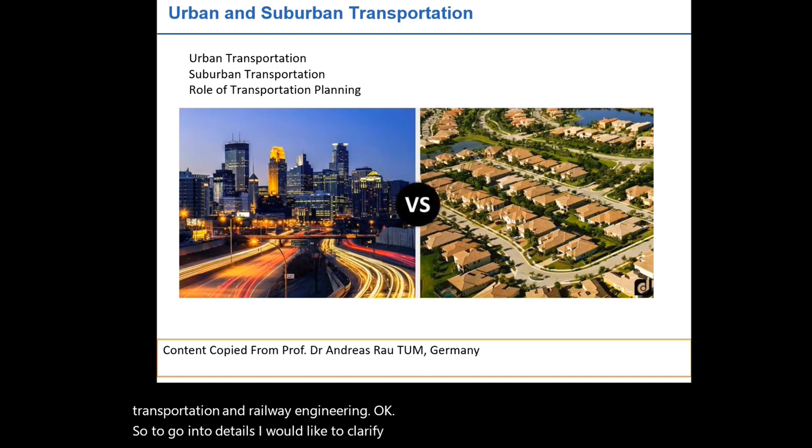So to go in details, I would like to clarify that this course content is copied from one of my teachers who's working at Technical University of Munich in Germany, Professor Dr. Andreas Rau. So I follow him as my benchmark. And of course, in this transportation system, most of the curriculum is designed according to MIT, Harvard, Technical University of Munich. Okay, so just to elevate and reach our level to the world standard organization.

So first of all, to go in very detail, I would like to explain what is the difference between urban transportation and suburban transportation. So the urban transportation system consists of passenger and freight, through which we differentiate in the modal choice, which is transportation services are actually classified into land, water, and air-based systems. So in urban transportation, the movement of people within urban areas or within a geographic area while using different transit modes such as buses, trains is called urban transportation.

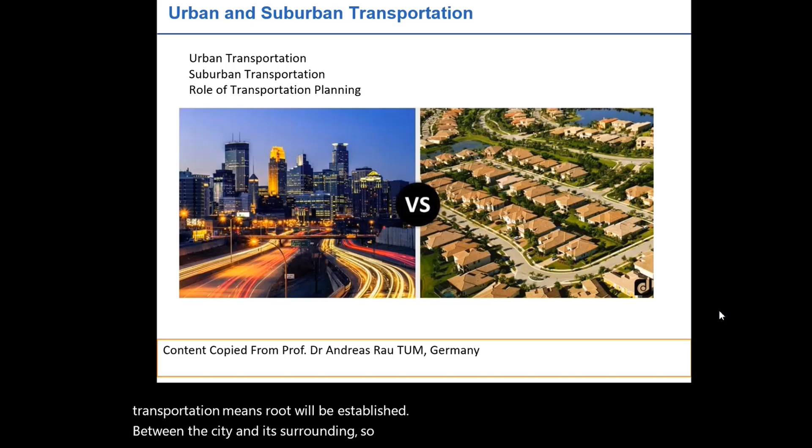So the second term is about suburban transportation. So keep in mind one thing, urban transportation will only operate within the city and within the geographic area of the same city, while suburban will actually connect the neighborhood along with the other rural areas. So suburban transportation means that the route will be established between the city and its surroundings. Okay, so basically all those people who are working within the city but live in the outskirts or outside of that city, this is called suburban transportation.

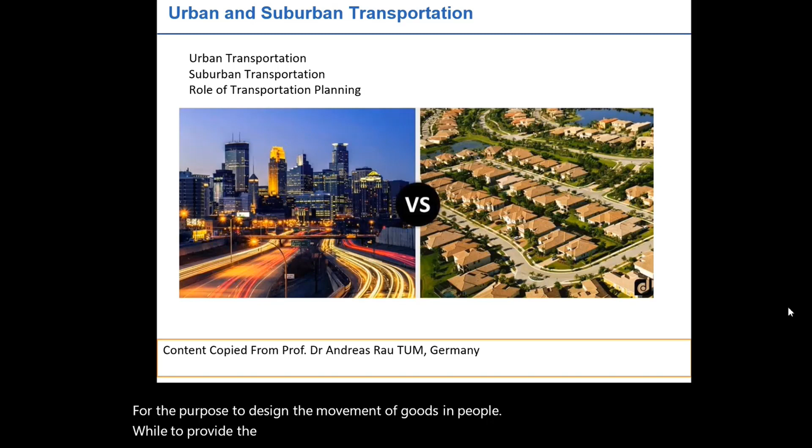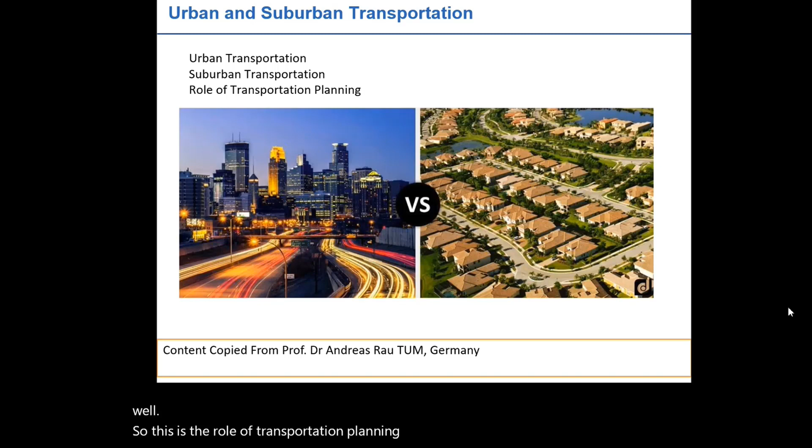So to understand the role of transportation planning, transportation planning basically entails creating the policies, goals, vision in future for the purpose to design the movement of goods and people, while providing the services for the current time as well as planning and designing for the future. So this is the role of transportation planning, to connect and design urban and suburban transportation.

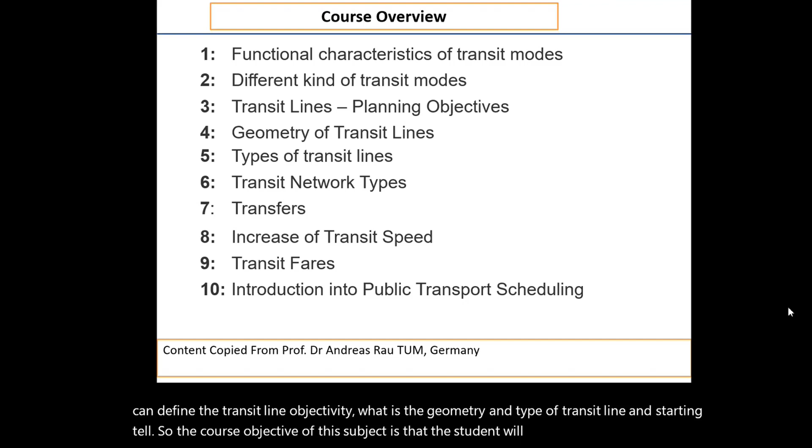In this specific subject or course, we will try to start from the functional characteristics of transit modes. We will also try to understand what are the different kinds of transit modes existing, how we can define the transit line objectivity, what is the geometry and type of transit line, and so on. So the course objective of this subject is that the student will understand the functional classification of transit modes, and at the end of this course, they will be able to model and design public transportation scheduling.

I would suggest that these slides will be more than enough. But again, if you want to go in more detail, I would suggest to go for Urban Transit Planning, the book which is published by Vuchic. So you can have a look. I would consider it as a benchmark for this subject.

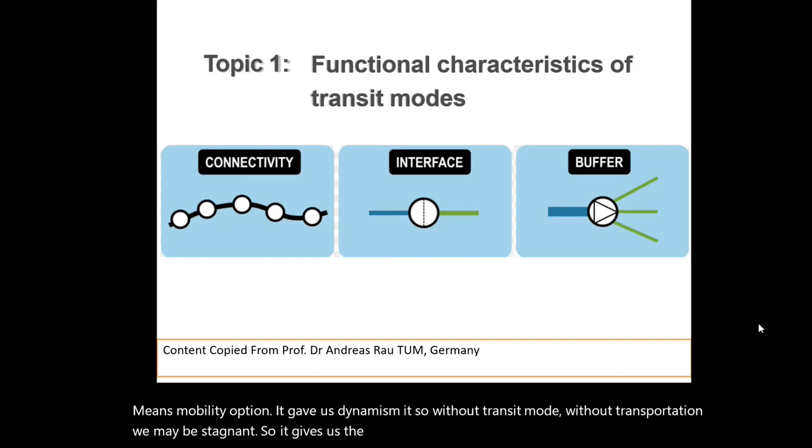First of all, to understand the functional characteristics of transit mode, or if someone asks you what is the function of transit or transportation. So transit function is a very general notation which defines the many ways how one could move around in any geographic area. Okay, so different types of function usually come to our mind whenever we define transit mode. Functions means what? Means mobility options. It gives us dynamism. So without transit mode, without transportation, we may be stagnant. Okay, so it gives us the option to move from one place to another place.

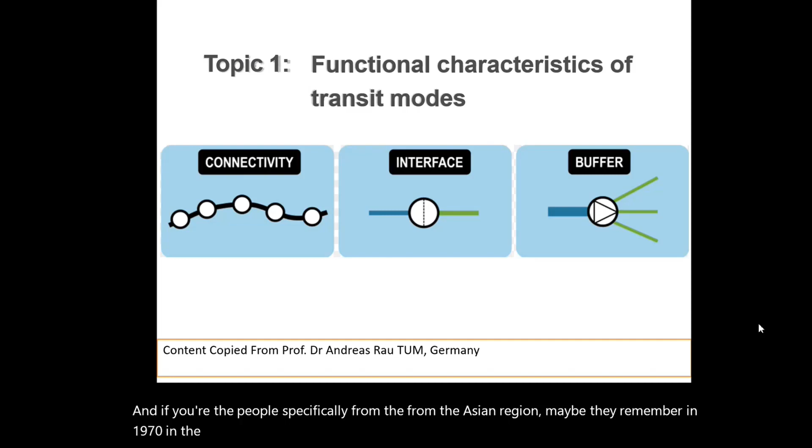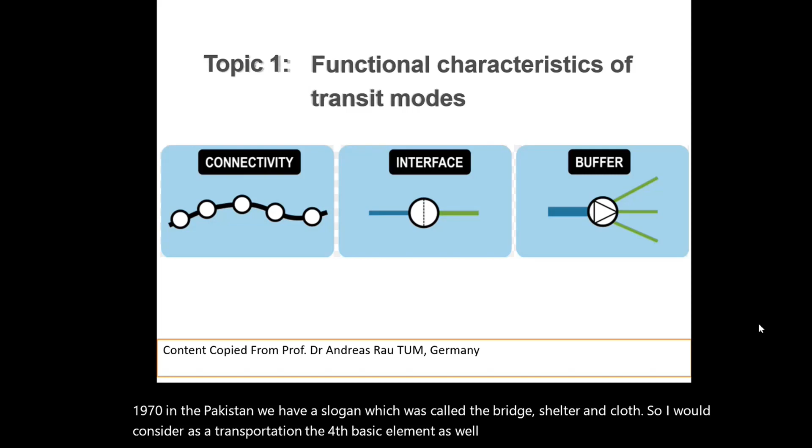And people specifically from the Asian region may remember in 1970 in Pakistan we had a slogan which was called bread, shelter, and cloth. So I would consider transportation the fourth basic element as well, which is called transit. Because without transit, I cannot see the future of humankind. And it also gives us openness and accessibility.

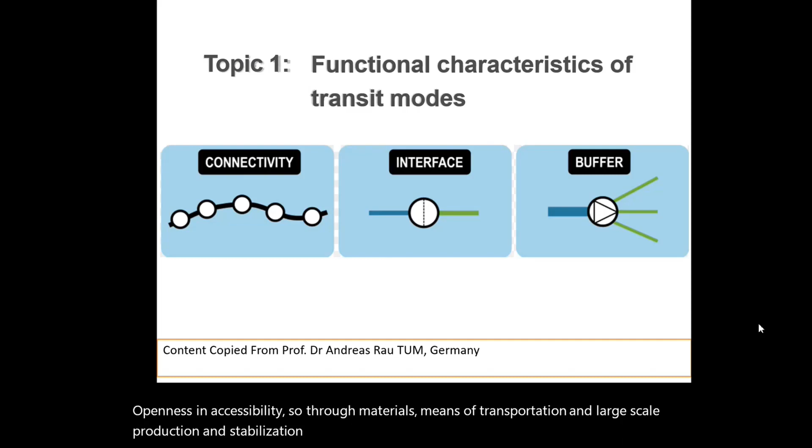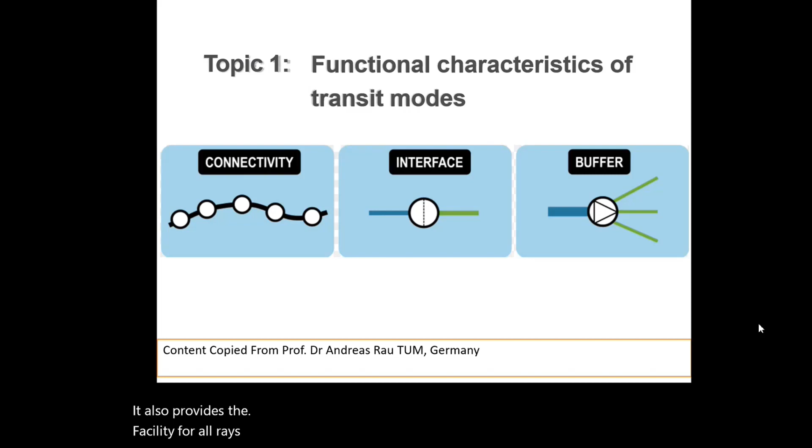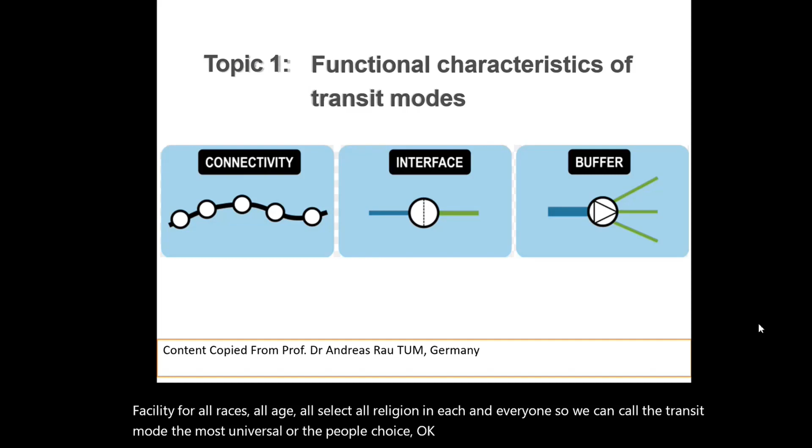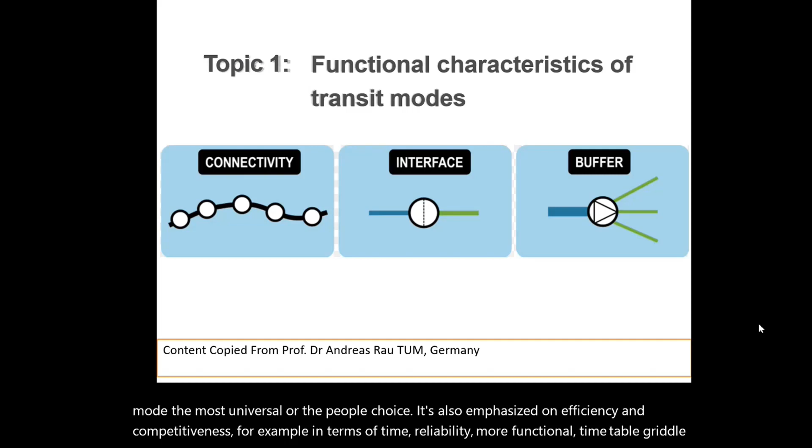So through materials, means of transportation, large scale production and stabilization of prices, all those are basically functions of transit mode. Okay. It also provides the facility for all races, all ages, all sects, all religions, each and everyone. So we can call the transit mode the most universal or the people's choice. Okay. It also emphasizes efficiency and competitiveness, for example, in terms of time reliability, more functional timetables, greater planning and management. According to this figure, you can see this is borrowed from the transportation geography book.

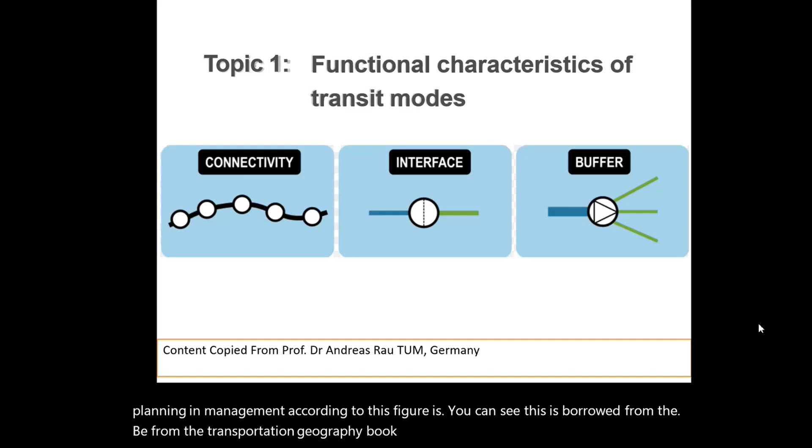The first purpose is that it gives us connectivity. The second one is interface, while the third one is buffer. So what is connectivity? Basically, connectivity means that the transportation terminal provides connectivity within a modal transportation network, which we call the only location from which a network can be entered or exited. Okay. While the second one is about the interface.

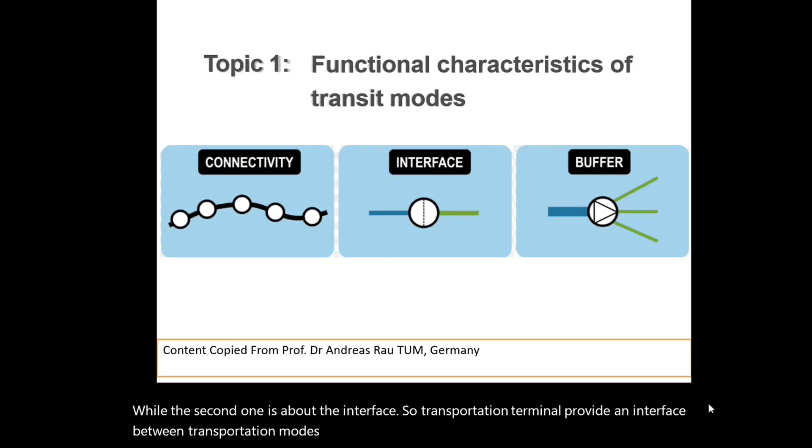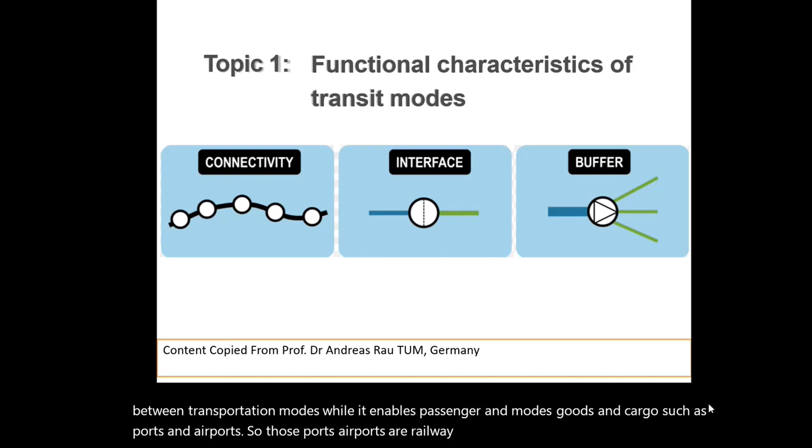So transportation terminals provide an interface between transportation modes, while they enable passengers, goods and cargo, such as ports and airports. So those ports, airports, or railway points are basically the points of interface between different modes of transportation. Okay, so it gives us the option to go from one mode to another mode.

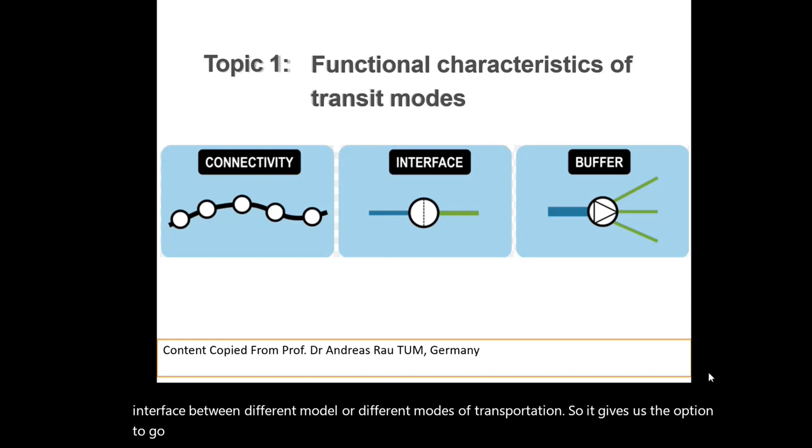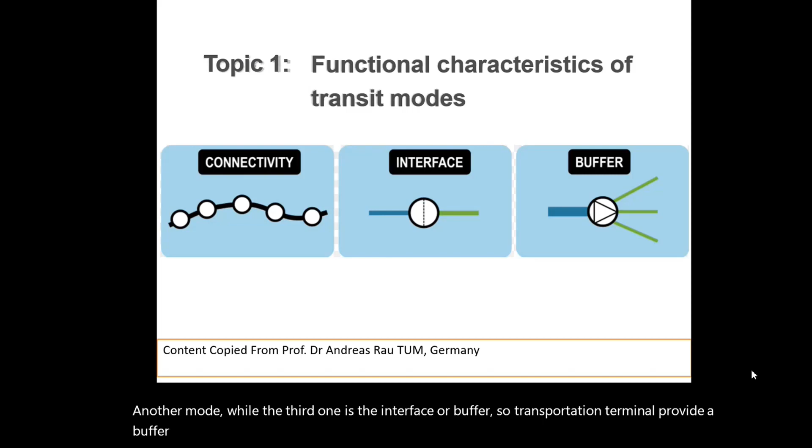While the third one is the buffer. Okay, so transportation terminals provide a buffer between the different capacity and frequency within the transportation modes such as air, land, road, and railway. Okay.

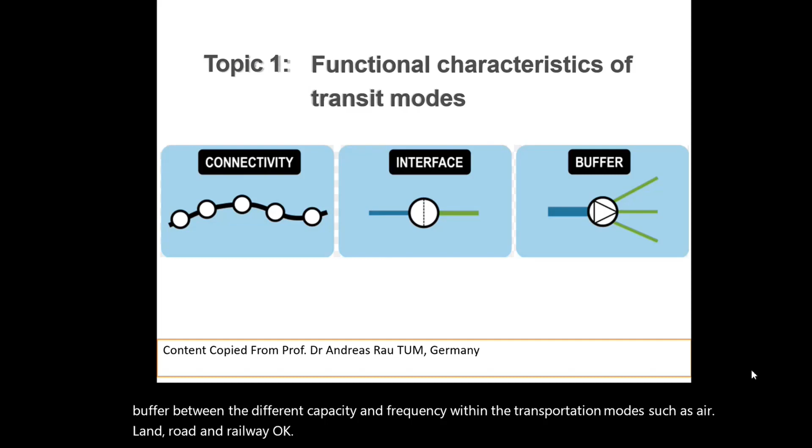To go into more detail, transit modes we usually evaluate or categorize on the basis of three different concepts. The first one is transit capacity, the second one is transit dynamics, while the third one is right of way. Okay. So the transit system could be categorized through specific right-of-way and technological operations, such as trolley buses, which have different right-of-way, different capacity, and different dynamics, while bus rapid transit, which we call BRT, or LRT, light rail transit, or rail rapid transit, or mass rapid transit. So all of them have different capacity, different dynamics, and different right-of-way.

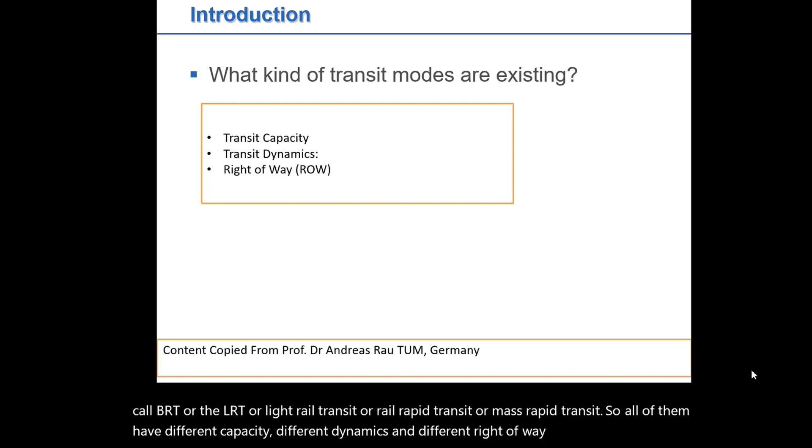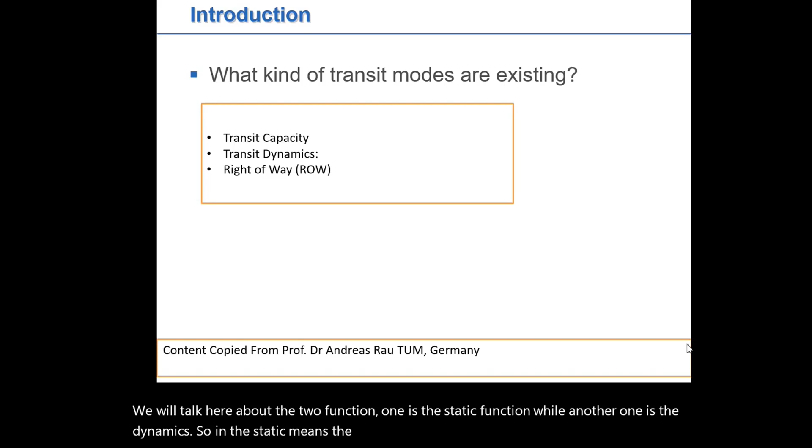Capacity means we will talk here about two functions. One is the static function, while the other one is the dynamic. So static means the total number of spaces or persons a vehicle can accommodate while standing and sitting. Okay. So of course, each and every transit will have a different transit capacity. But when we talk about dynamics, that means the maximum number of transit units, vehicle spaces, or persons that can be transported on a transit line between two fixed points.

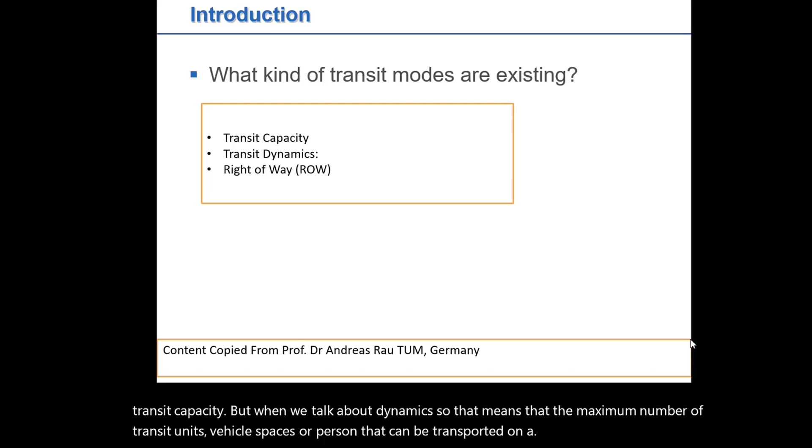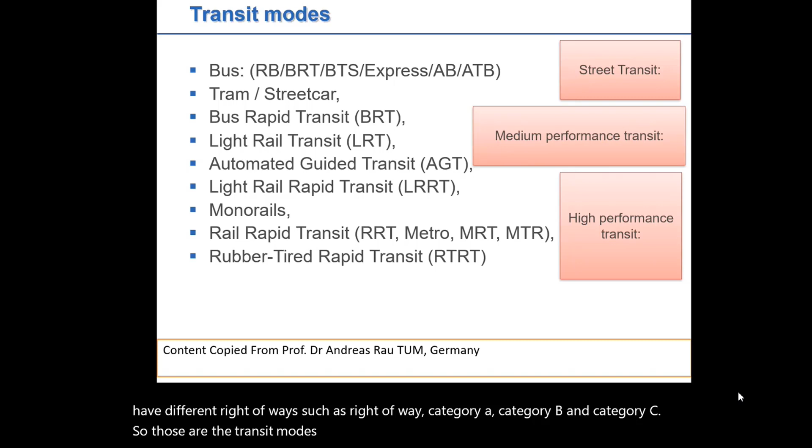While when we talk about right of way, it is basically the easement or the kind of reservation over the lane for transportation purposes. Okay, so we have different right of way, such as right of way category A, category B, and category C. So those are the transit modes which we will talk about in this lecture in more detail. Okay, starting from bus till rubber-tired rapid transit.

So starting with our very first street transit mode, which we call bus or regular buses. A bus is a vehicle that carries significantly more passengers than an average car or a van. It's most commonly used in public transportation, but is also used for charter purposes, which we call private ownership. So of course, buses could be run by the city administration, or by a private partnership program, or maybe an individual can also hold this ownership. So the common urban bus routes serve all stops.

Okay. And the next one is the upgraded form of a bus, bus rapid transit, which we call BRT. So BRT basically has a unique right of way in most of the cases. It's basically an integrated system of distinct bus vehicles, which mostly have separate right of way category B or a preferential treatment such as at intersections. It has an intelligent transportation system. It usually operates on a priority basis. They also have safer operation as compared to regular buses.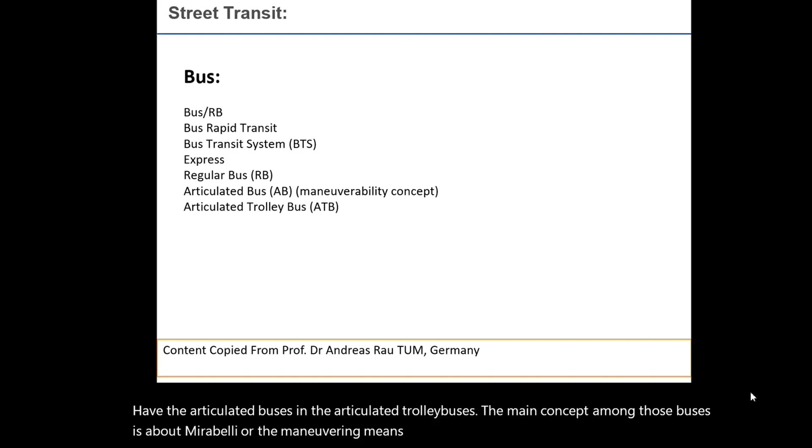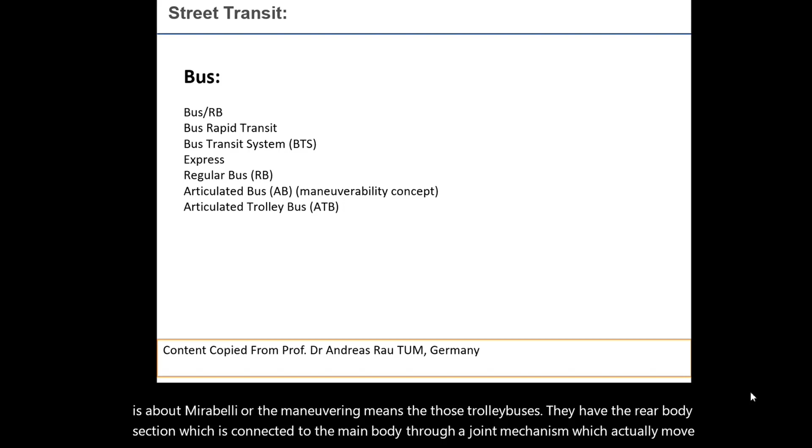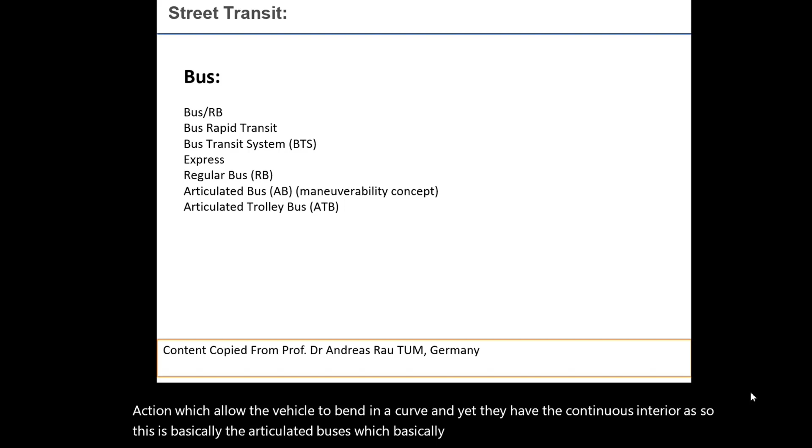So next we have the articulated buses and the articulated trolley buses. The main concept among those buses is maneuverability. Those buses have a rear body section which is connected to the main body through a joint mechanism, which allows the vehicle to bend in a curve, and yet they have a continuous interior as well. Okay, so these are basically the articulated buses, which work on the concept of more freedom, or you can call it more bending capacity.

So the next transit mode is streetcars.

So streetcars in the old times, at least 100 years before, were basically horse driven or powered through batteries. A streetcar, also called a tram or trolley, runs on tracks laid in the street, paved or unpaved. But of course, it may not work on the unpaved one.

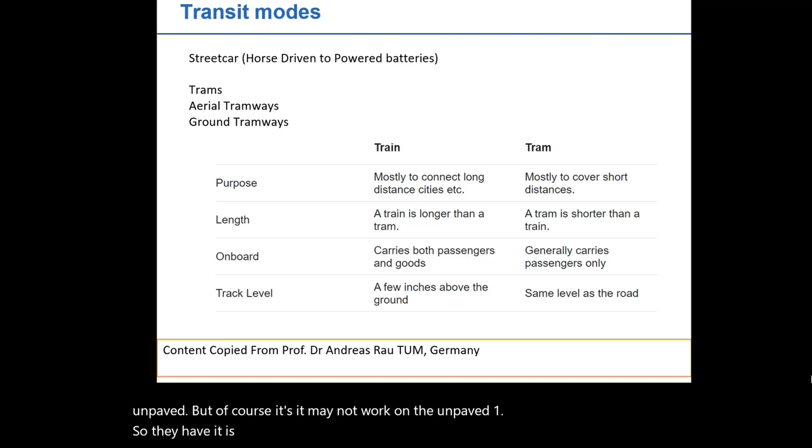It is usually operated in a single unit. Before, it was driven by horses, then it was converted to power batteries, and later on it was converted to electric. As a transportation planner, you need to understand the history of the transit mode as well. So the upgraded form is called tram.

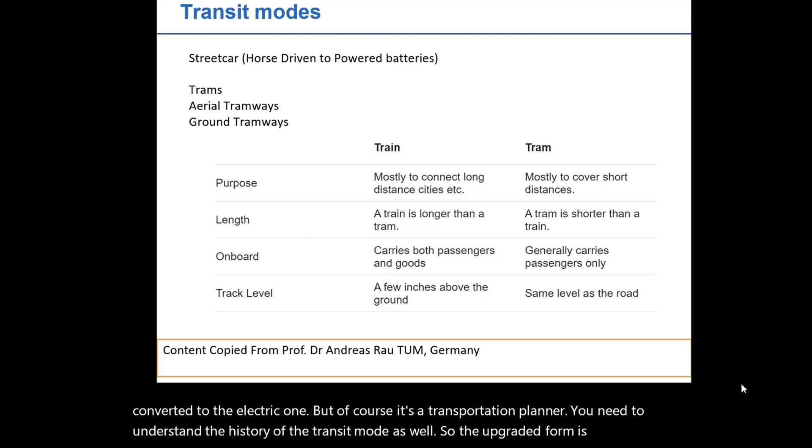A tram is basically a subtype of railway. Underground rapid transit may work in underground tunnels, but the tram is most of the time operated in right of way category C, meaning it shares its space with other types like regular buses. So the tram is a rail vehicle that travels on ground tracks on public urban streets. It is commonly called street transit as well.

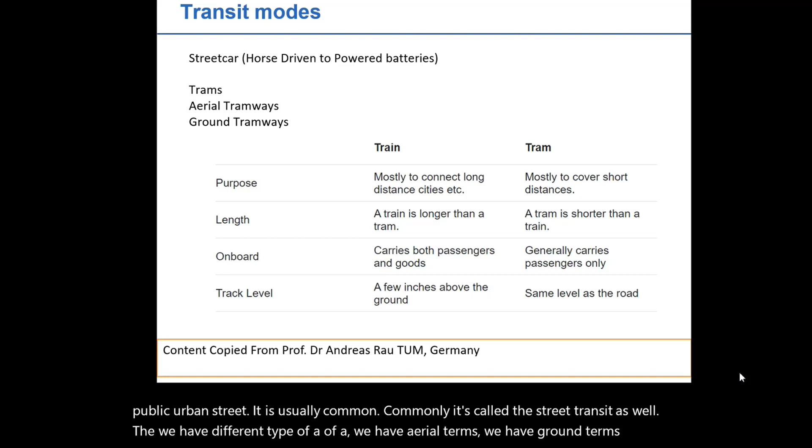We have different types: we have aerial trams, we have ground trams. If we want to understand the basic difference between train and tram, it may be separated on the basis of purpose, length, onboard, and track level. For example, a train mostly connects long-distance cities, but a tram covers short distances. The length of the train is usually much greater, while the tram is usually operated in a single unit.

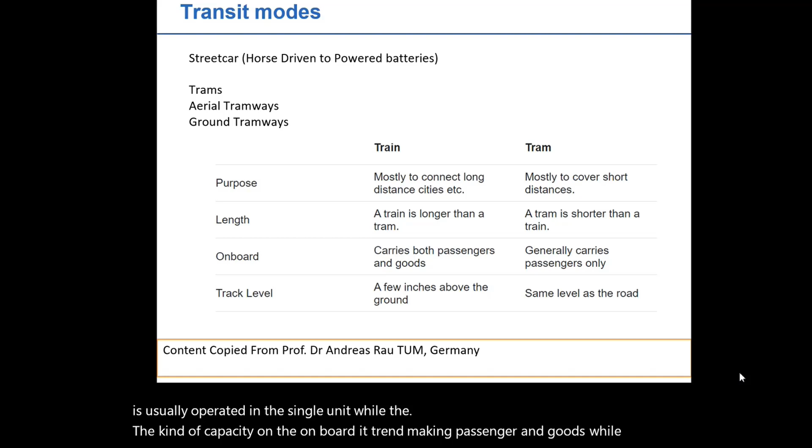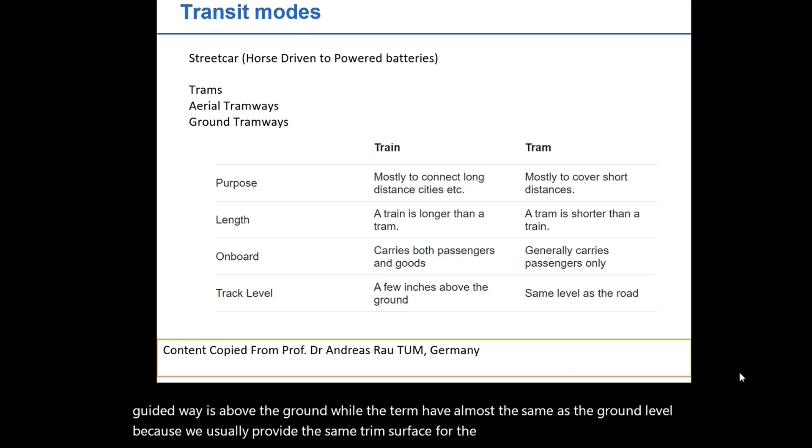In terms of onboard capacity, a train may carry passengers and goods, while a tram only operates for passengers. In terms of track level, a train's track guideway is a little above the ground, while the tram is almost at ground level, because we usually provide the same surface for other types of transit modes as well.

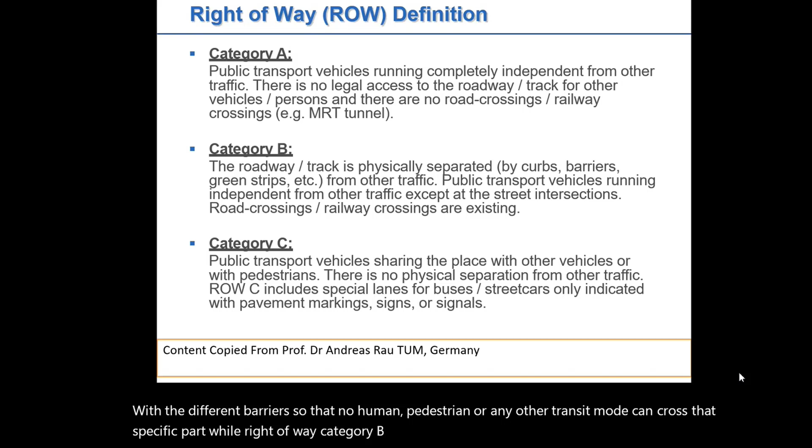Right of way category B means it's physically separated, but shared at some specific spots, such as road crossings or street intersections. The third is category C, from which the tram usually operates, as we already explained. Right of way category C means those vehicles do not have a dedicated, independent, or separate way. They actually work in a completely mixed type of right of way, so there is no physical separation from other types of traffic.

It includes special lanes for buses or streetcars, which are basically paved or marked with signs or signals. We will explain the difference between category A, category B, and category C in a later section. Thank you very much.